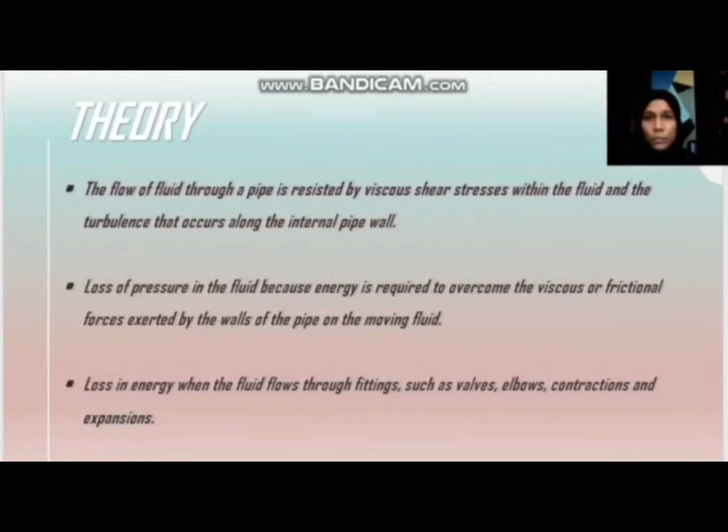In addition to energy loss due to frictional forces, there is a loss in energy when fluid flows through fittings such as valves, elbows, contractions, and expansions. This pressure loss is mainly due to local flow separation as it moves through such fittings.

The pressure loss in pipe flows is commonly referred to as head loss. Frictional losses are mainly caused in a straight pipe, while friction loss induced in fittings such as bends, couplings, valves, or transitions in hose or pipe accounts for minor losses.

Frictional losses are referred to as major losses, HL major, while losses through fittings are called minor losses, HL minor. Together, they make up the total head losses, HL, for pipe flows.

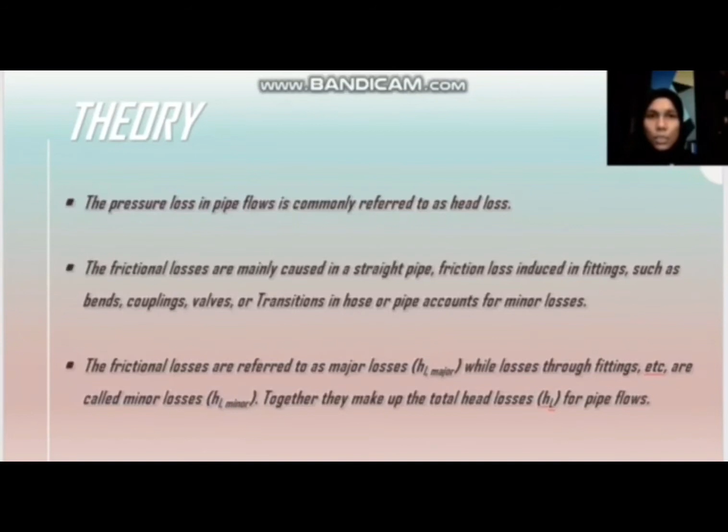Here are the formulas used to calculate head losses in pipes. The first is major losses, HF, equal to F times L V squared, divided by 2DG, where F is the Darcy-Weisbach friction factor, L is the length of pipe, V is the mean velocity of flow in the pipe, D is the diameter of pipe, and G is the gravitational acceleration.

Minor losses, HL minor, equal K times V squared over 2G, where K is a dimensionless loss coefficient obtained experimentally.

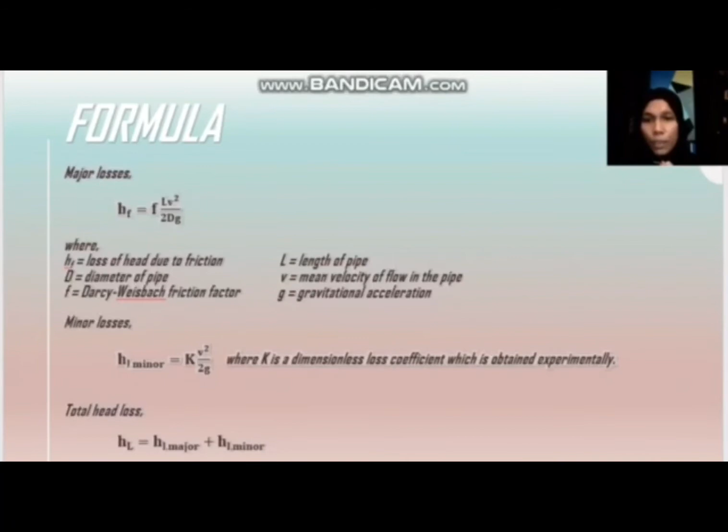Lastly, the total head loss, HL, equals HL major or HF plus HL minor. The friction loss in uniform straight sections of pipe, known as major loss, is caused by the effects of viscosity, the movement of fluid molecules against each other or against the rough wall of the pipe.

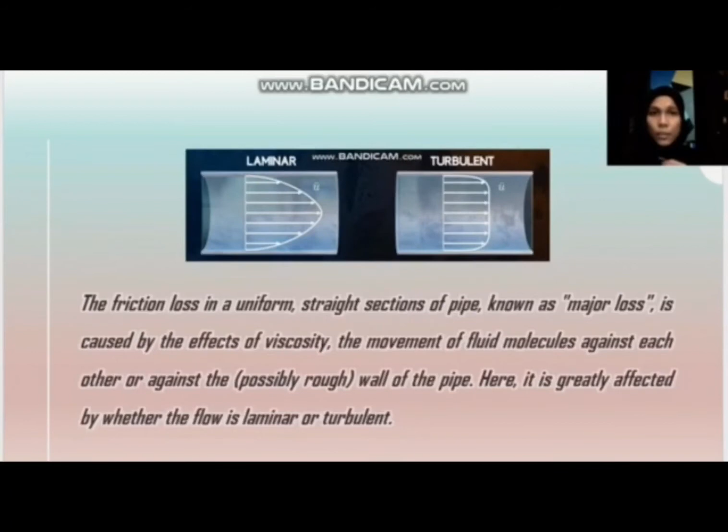To identify the type of flow, the Reynolds number can be used to estimate if a fluid flow is laminar or turbulent. For laminar flow, the Reynolds number is below 2100, and turbulent flow ranges between 2100 and 4000. Meanwhile, transitional flow, which is a mixture of laminar and turbulent flow, has a Reynolds number above 4000.

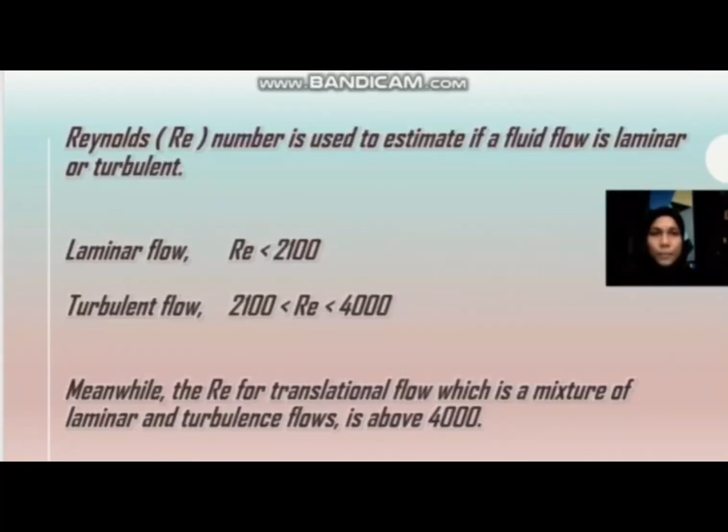Firstly, introduction. For the brief background, the experiment studies the flow through round pipes and pipe fittings. The fluid will go through the elbow and valve in the closed circuit of the pipe.

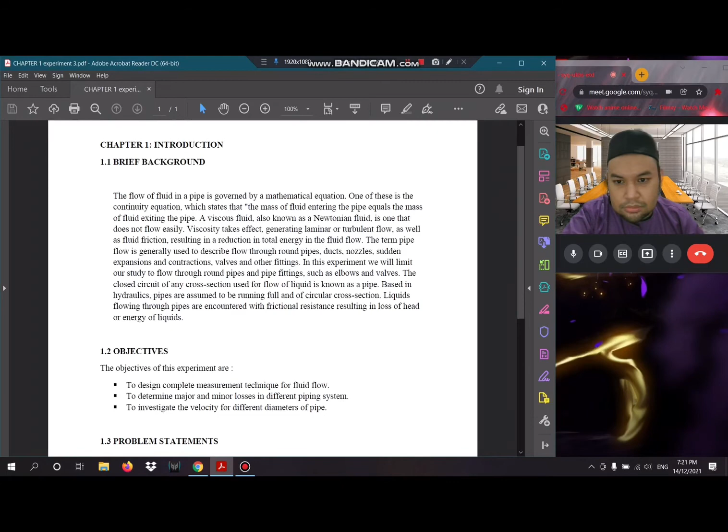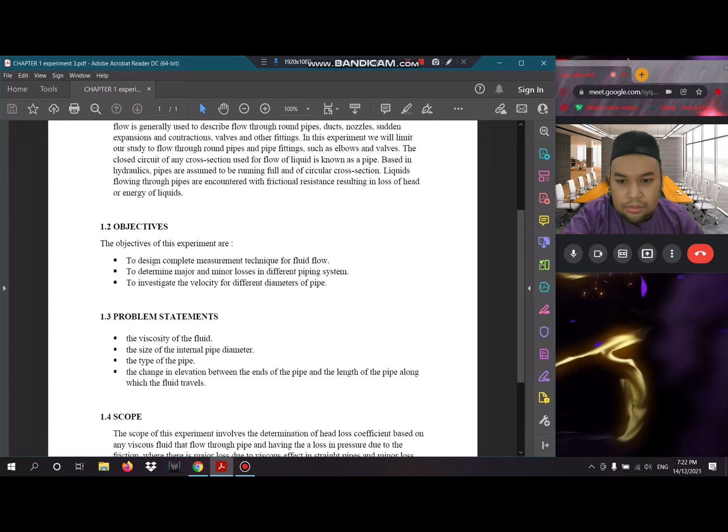Next, the objectives: firstly, to design a complete measurement technique for fluid flow; second, to determine major and minor losses in different piping systems; and lastly, to investigate the velocity for different diameters of pipe.

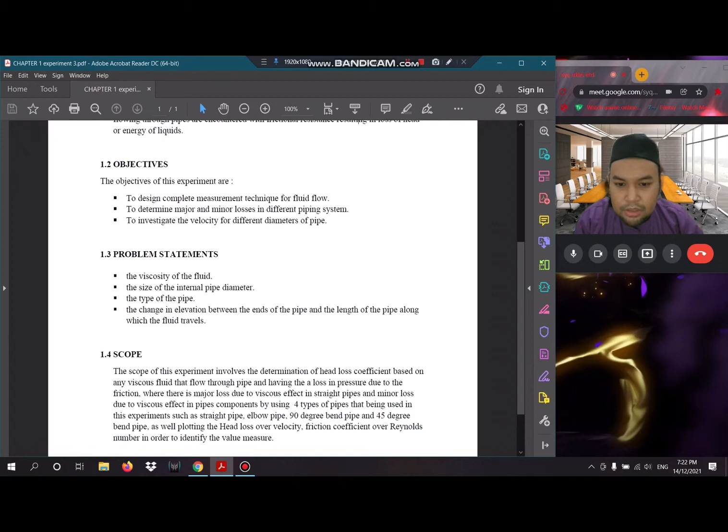Next, the problem statement: firstly, the viscosity of fluid; second, the size of internal pipe diameter; third, the type of pipe; and lastly, the change in elevation between the ends of the pipe and the length of the pipe along which the fluid travels.

Last but not least is the scope. The scope of the experiment involves determining the head loss coefficient based on any viscous fluid that flows through the pipe, and the loss of pressure due to friction.

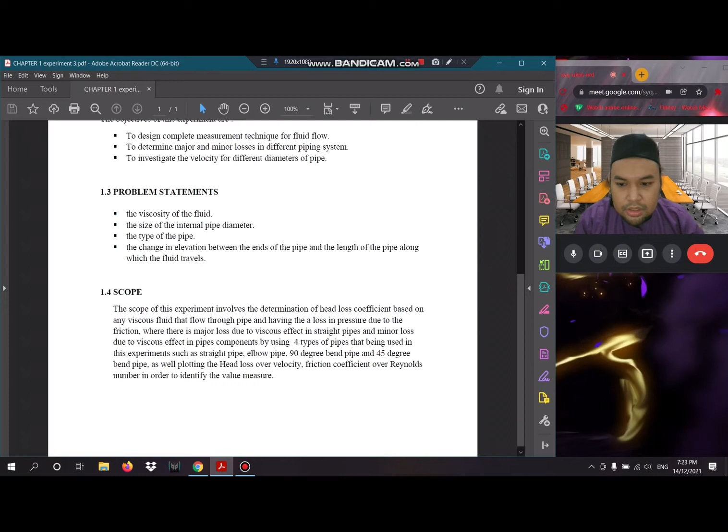There is also the major loss due to viscous effect in straight pipe and the minor loss due to viscous effect in the pipe component, using the 4 types of pipe in this experiment: straight pipe, elbow pipe, 90-degree bend pipe, and 45-degree bend pipe. We will plot the head loss over velocity and friction coefficient over Reynolds number in order to identify the value measured. Thank you very much.

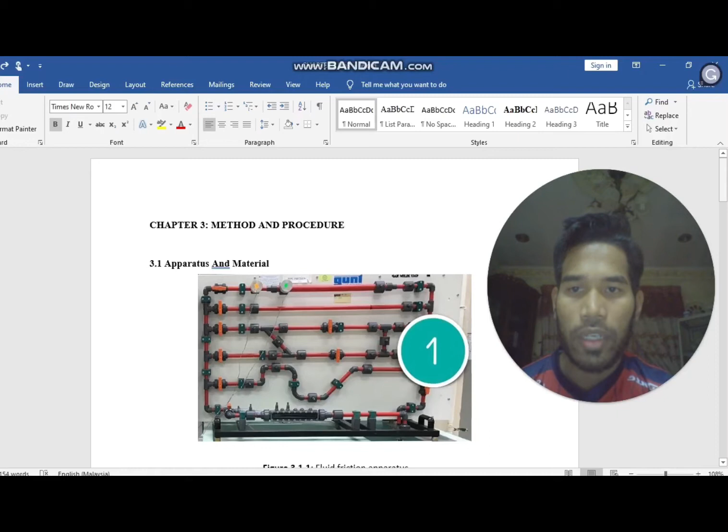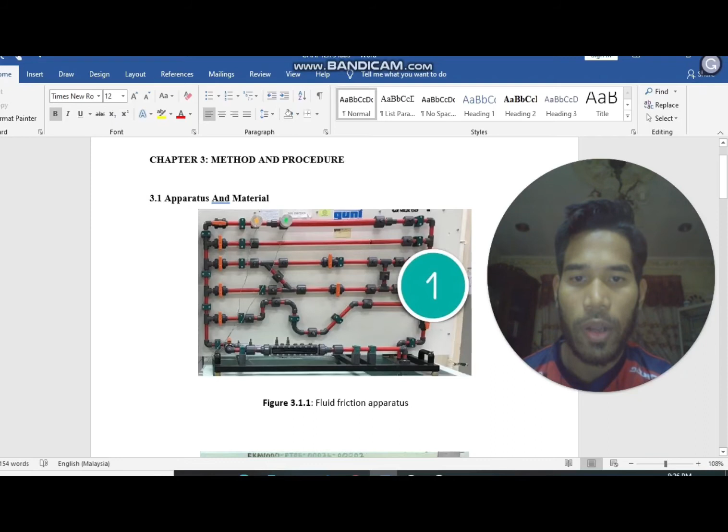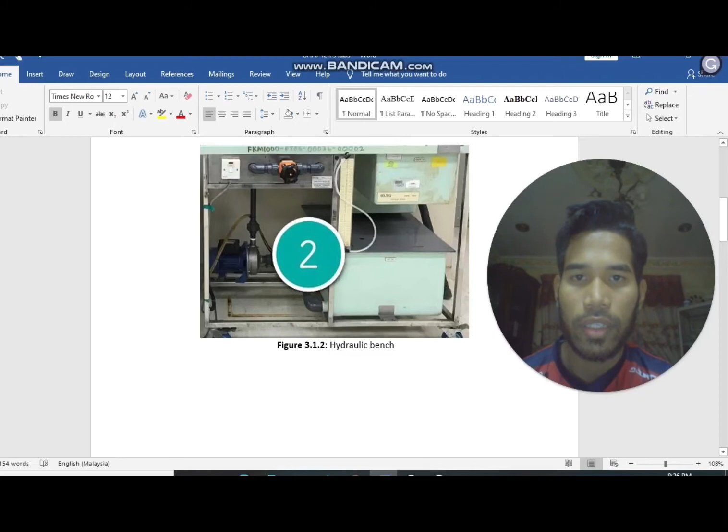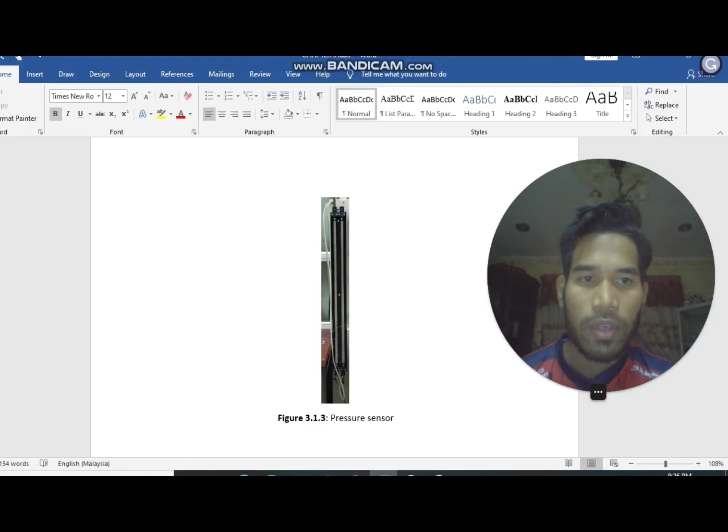3.1, apparatus and material. I want to show the figures first. Figure 3.1.1 is the fluid friction apparatus. Figure 3.1.2 is the hydraulic bench. Figure 3.1.3 is the pressure sensor. And lastly, figure 3.1.4 is the data measurement and data acquisition system.

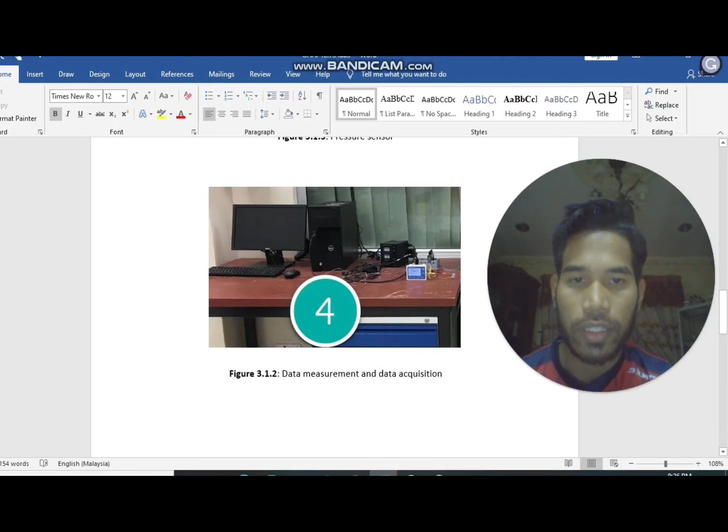3.2, experiment procedure. First, by turning the valve tab to the left, the fluid friction device valve is opened. When all of the valves are turned on, the power supply and the pump can be switched on. Second, the control valve is used and the water valve adjustment is adjusted. Then the unused valve will be closed for the first experiment, which is the straight pipe.

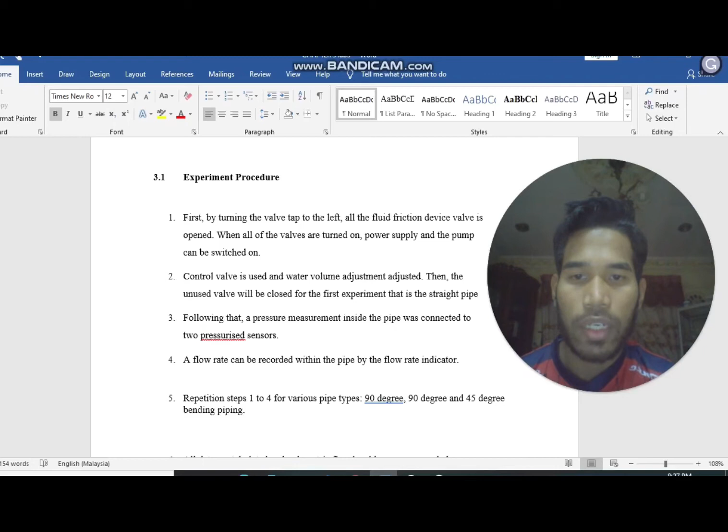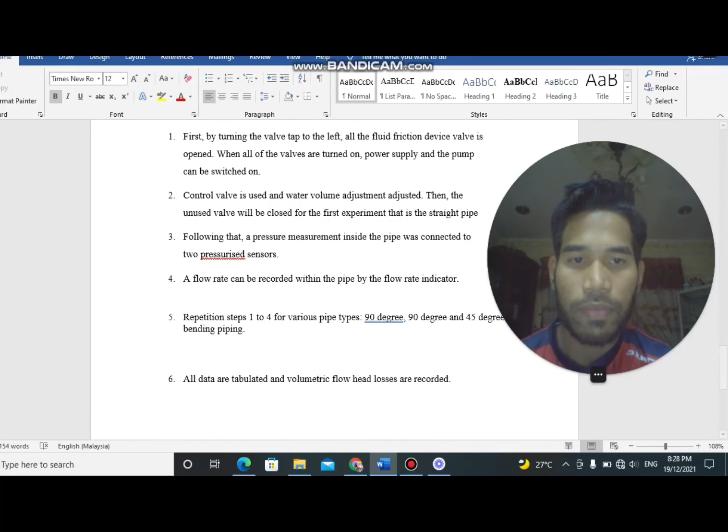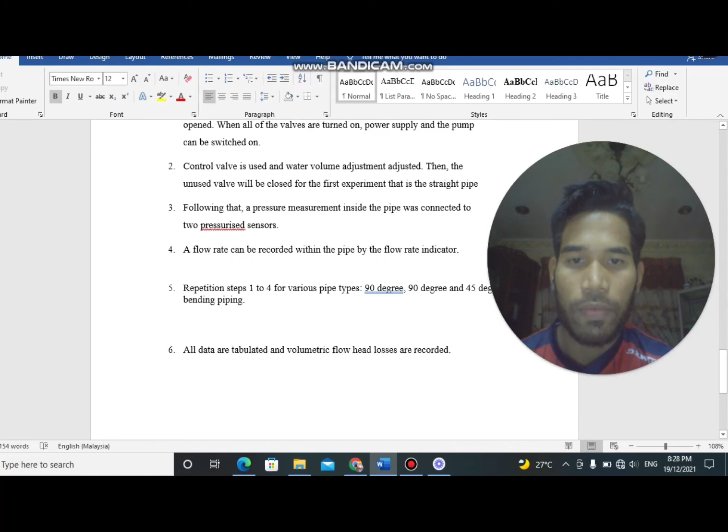Third, following that, a pressure measurement inside the pipe was connected to two pressure sensors, and a flow rate can be recorded within the pipe by the flow rate indicator. Then repeat step 1 to step 4 for various pipe types: 90 degree and 45 degree bend piping. Lastly, all the data is tabulated and volumetric flow and head loss are recorded. That's all for me, thank you.

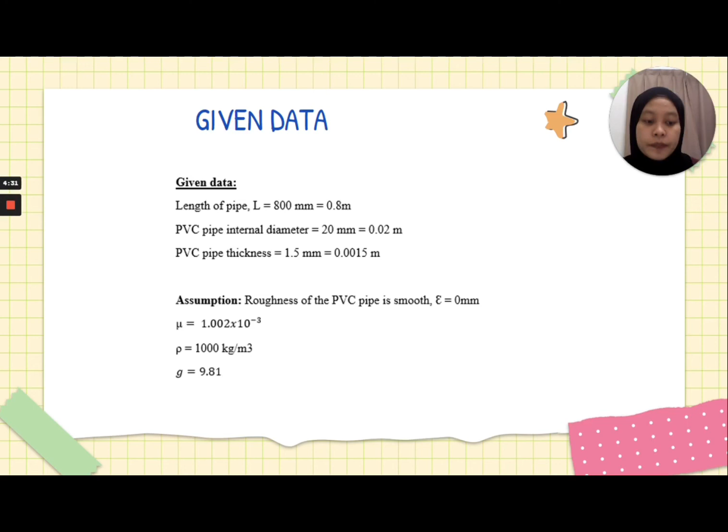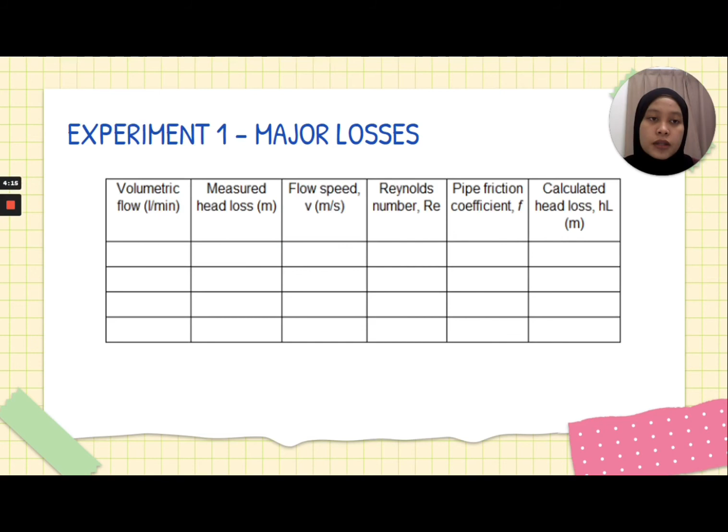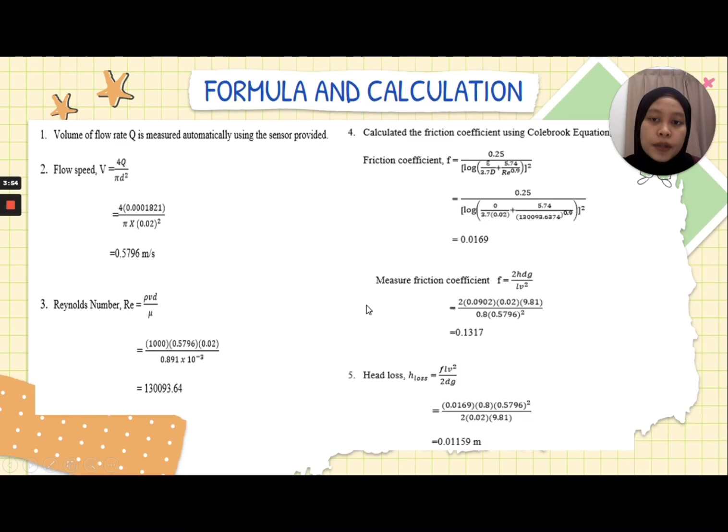We start with the given data: L is 0.8 meter, internal diameter is 0.02 meter, and pipe thickness is 0.0015 meter. For experiment 1, major losses, we should complete this table by calculating flow speed, Reynolds number, pipe friction coefficient, and calculated head losses. We use the flow speed formula, Reynolds number formula, friction coefficient formula, and head losses formula to do the calculations and complete the table. This is the result for the straight pipe, elbow pipe, 90 degree bend pipe, and 45 degree bend pipe.